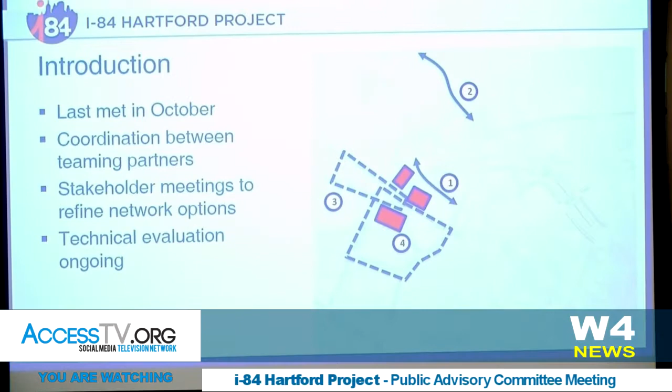where the new ramps are going to touch down to the new boulevard next to Bushnell Park. These are all really interrelated, and to further complicate the issue, depending on which station concept — north or south of Asylum — we go with, that may dictate different road network options. So we're trying to look at all these things together, and as you can imagine it's very complicated, but we're going to walk through a presentation largely involving this area today.

But I want to invite Casey to come up here and start that conversation, and Nick Mandler will be running the 3D model, so if there are any visualizations we need to see that will help us communicate this better, just let us know and we'll go to those areas.

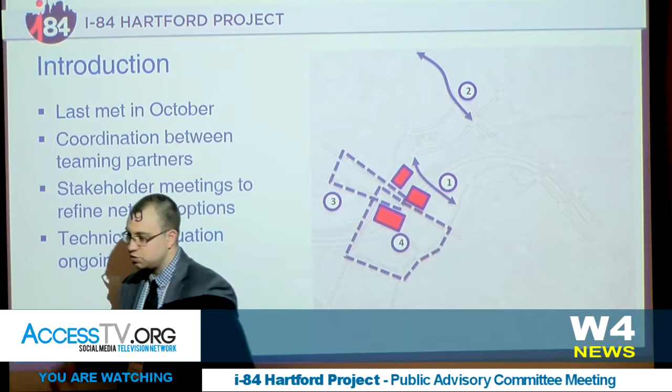Thanks, Mike. Good afternoon, everyone. Hey, Mike. Bear with me, I'm just getting my laser pointer set.

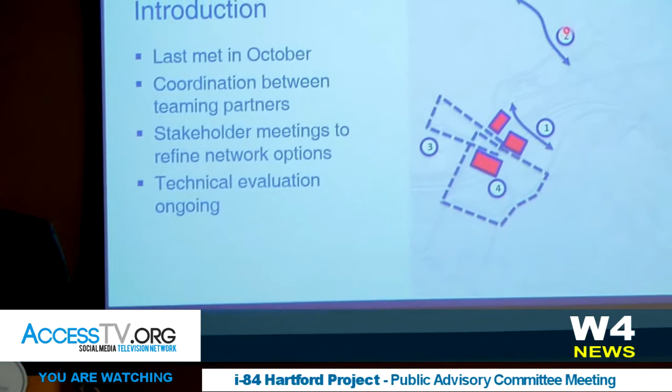Okay, all right, so I'm going to talk about 3 of the areas that Mike introduced on this slide: the Garden Street piece, the association with traffic towards the Asylum Hill neighborhood, Ashley Street, and then the Trident.

And actually later, in the second module, this area here where the eastbound ramps are, near Bushnell Park, that'll be discussed, really intermixed with the multimodal station planning.

So I wanted to start by resetting everyone where we were at in June, the last time we presented to this group with the lowered highway alternative. This is our eastern interchange option 3BE5, looking at the eastern part of our project area. Here's Broad Street, and the map extends to about Trumbull Street.

With the lowered highway, the big first piece is the relocated railroad shown with this red line work, which would go underneath Broad, Farmington and Asylum, rail platforms in this general area, and continue north under Walnut, then Albany and Main. Where does it go today? It comes under I-84, around Bushnell Park, Union Station's right here, under I-84 again, and matches up where our line work is up in the Walnut Street area.

That relocation of the railroad is what allows us to drop the highway down to grade. So this yellow band here, the proposed I-84, would go beneath Broad Street, beneath Asylum, and continue around into that kind of canyon area we have today, under High, Ann Uccello Streets.

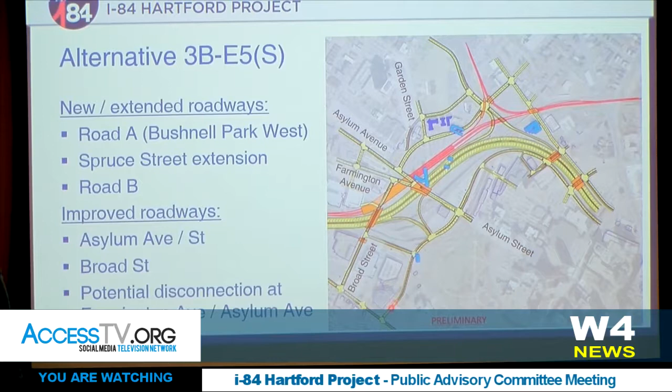In terms of ramping, here in the eastern part of the project area, we propose eastbound off and on ramps to a new road, which would connect Capitol up to Asylum, and westbound off and on ramps at a relocated Cogswell Street. Today, Cogswell Street comes up to intersect with Myrtle and Garden. We're proposing to realign it, ramps to here, and then it matches into Edward Street at the intersection with Walnut.

So this is the version of this alternative we had back in June. We wanted to highlight some of the new connections inherent in that proposal. That new road from Capitol to Asylum, Road A or Bushnell Park West, is a new north-south roadway that's not there today.

We're proposing to extend Spruce Street. Today Spruce Street ends at Church. We're proposing to bring it all the way around into Chapel Street South, creating one long street that would start all the way down at Capitol and extend over to the river. And then we have that new east-west roadway, which would connect Broad and that new Road A, Bushnell Park West.

In addition to those new connections, we see opportunities to really improve the character of Asylum and Broad. Today you have on or off ramps on each of those roadways; under this proposal, you would have none. So there's a real opportunity to strengthen the way those streets serve, not just as ways to move cars around, but for people moving between the neighborhoods and the city.

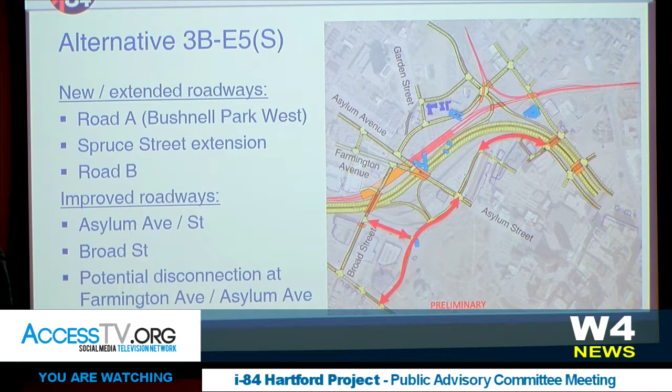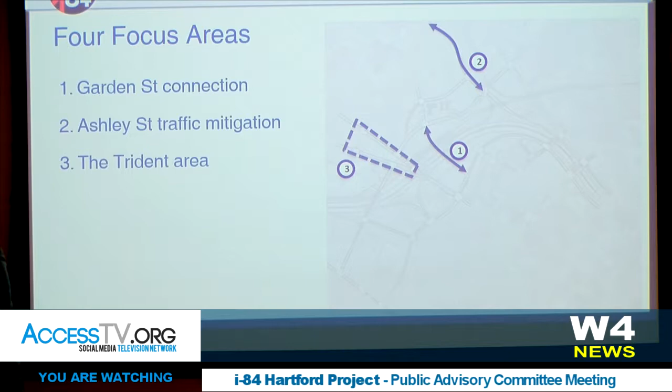Mike touched on these — the four real focus areas of our work over the last several months: looking at that new connection across the highway, which I'll talk about; addressing comments we've received about the perception that the new ramp system might push traffic towards some residential streets in Asylum Hill; and the Trident, where we've heard from every cross-section of our advisory committee, stakeholders, and the public how important it is to find a good solution there.

And then when we talk about the station, this area, which we envision as potentially being capped as part of the lowered highway alternative, maybe Nick can show you. So he's got a piece on this.

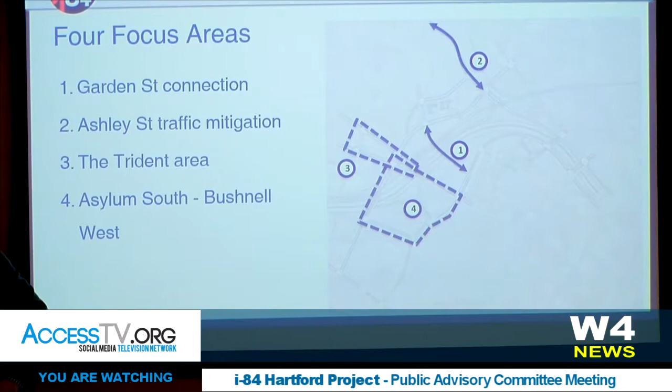So this is the area where we're talking about potentially capping, between Broad Street and Asylum. The things we're looking at there could involve how a local street could be connected there, and what some of the options are.

For that first focus area, we've talked a lot about how we could improve connectivity over the highway. Today, Myrtle Street comes down the hill, goes under the highway, and matches with Church Street. That connection exists today, but with the lowered highway, we can't maintain it in that configuration.

The lowered highway would be at the same grade as that roadway, so with some of our other interchange options, we've come up with different ways to address that.

Is Darth Vader going to come in? Sorry about that.

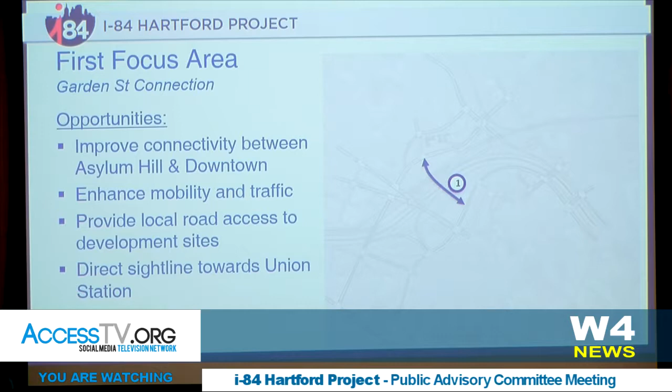One of the detriments of this interchange option had been an inability to connect there, given the location of the ramping system and local streets. We struggled to find a way to connect that. Through collaboration with Tom Jost and Bill, the city's consultant team, we identified a way we weren't looking at before: extending Garden Street. Today Garden Street angles down into where the Asylum ramp comes in. The idea is to extend it over the highway all the way to Spruce Street, adding an east-west connection. We like redundancy in the road network.

Here's a clearer picture of what that could look like. It's this yellow and orange piece, where the orange denotes the bridge over the railroad and the highway. That east-west redundancy is really helpful to us.

Many of you know the struggles we've had with traffic at the Trident, and the struggles we have today under this new lowered highway alternative — there's a lot of traffic trying to make its way through that intersection. Any redundancy we can provide in the roadway network can help draw traffic out and make that operate better.

In addition to being an east-west crossing of the highway, we see an opportunity to facilitate north-south movement as well. You could start from Capitol Avenue, take the new Bushnell Park West or Road A north to Asylum, continue through, take a left and go up Garden Street — another way for people to go from Frog Hollow to Asylum Hill and back.

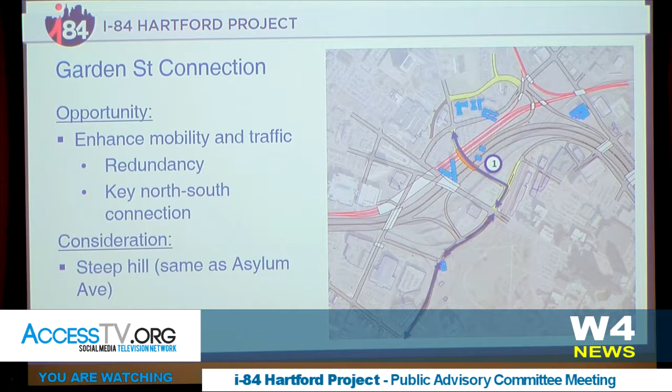We do want to mention the grade. The roadway is going from a higher point on the hill than Asylum goes to, so it would be about the same grade as Asylum. We're looking iteratively at the best way to work with that.

We're looking at Spruce Street towards the bottom of the hill — can we raise that a little bit? As we continue to look at this Garden Street extension, those are details we're working to bring to the public and to you early next year.

Moving on to the second focus area, which we're calling the Ashley Street traffic mitigation. We've heard quite a few comments since we first proposed this ramp system. I've zoomed out here — the western extent of this map is the St. Francis Hospital campus, and here's the ramp system that relocated Cogswell Street and Fraser Place.

Today, the primary east-west traffic route from I-84 to St. Francis is Collins Street. You'd come off I-84 from the east, off Asylum, up Garden, and then you're on Collins right to St. Francis. One question or critique of this alternative had been that the ramping system appeared to point cars toward a more residential area — Ashley Street and the Sargeant Street residential neighborhood of Asylum Hill.

Being engineers, we like to draw roads, so we put pen to paper to find ways to change the road network that might better fit traffic patterns as they are today. First, we had the idea of looping Fraser Place around to Garden Street. That's a bit more roundabout, and it would impact property owned by the Hartford that they use for parking. So that was one thing we looked at.

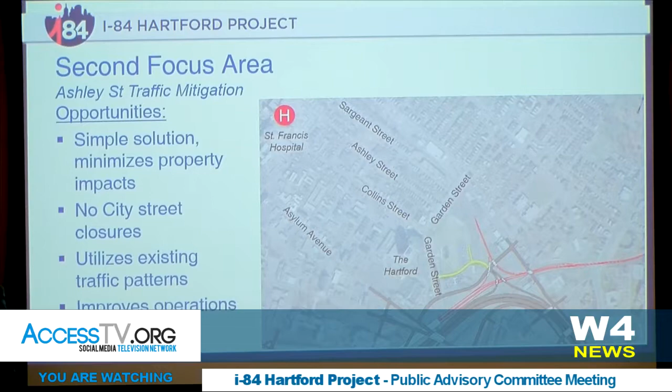So what you're changing is the Asylum Street exit ramp, right? Yeah, as part of this lowered highway interchange option, the Asylum off-ramp, which comes here today to Asylum, is pushed back and goes up to that relocated Cogswell Street / Edward Street. Okay, so the ramp isn't really moving, it's the feed into the public streets that's changing. That's right. Okay, right, I got it.

What are the two options? I think he's talking about these two. You mentioned two options. No, the Garden Street crossover, the new connection that would replace Myrtle, and the one he's talking about there is for the realignment. Okay, and the second one is the one you just wrote? No, these both would happen together. Oh, they would both? Yeah, so let me advance because the next slide kind of deals with that.

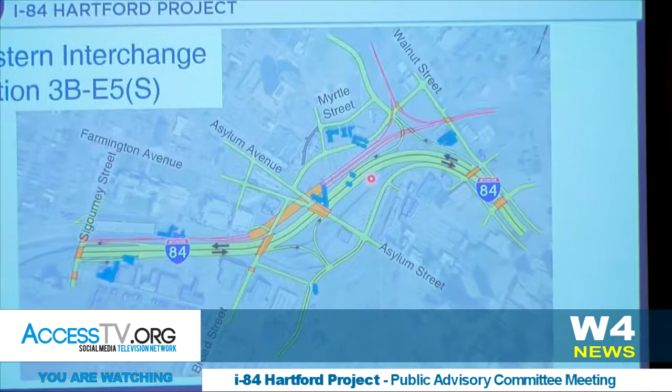So basically what we're saying is this is how the interchange option looked before, where Fraser Place went all the way up, lined up with Ashley, no Garden Street. So we're looking at adding that Garden Street, making that change near Myrtle Street, and ultimately that's what the current version of the alternative could look like now. So the westbound off-ramp would lead directly into Myrtle Street? That's correct. And in addition, you would do the S-shaped curve into Collins? No, this street just lines up to right where Fraser Place is today. So Fraser Place continues up to where it does today, and it just kind of tees into this as a side road.

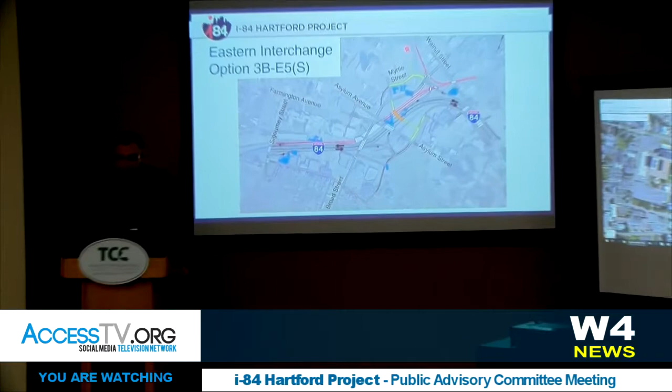So this is Myrtle, and that's Fraser. Still look like you're not clear on it. Because we're going to talk about the Trident next, so it doesn't get any easier. I want to just make sure we're good on this.

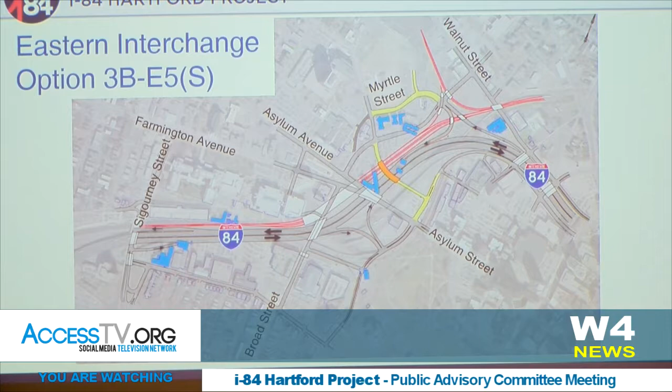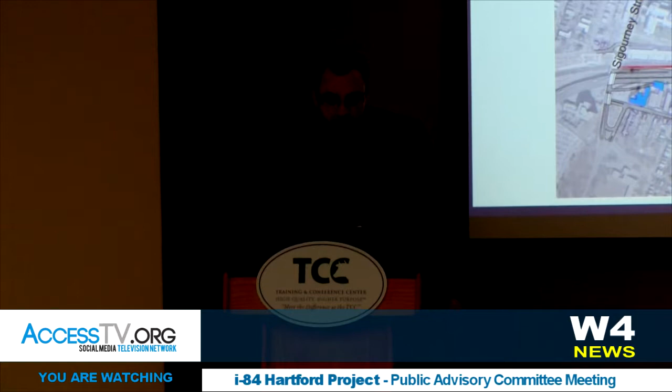Okay, well I have another question then. What impact does that have on traffic that's going to the Aetna and the Hartford? It looks like it favors the Hartford, but it sort of gums up the Aetna. Is that... So I think the two changes that I talked about wouldn't really affect how traffic goes to Aetna. They would probably either be taking this direct left off the ramp, or they would be just going all the way to Sigourney Street. So under any revision to this street network, I don't think that really affects how people get to Aetna. And ultimately, I think it still really does feed into the Hartford's parking areas in a similar manner. We'll certainly look at how those various turning movements work just to make sure they're okay.

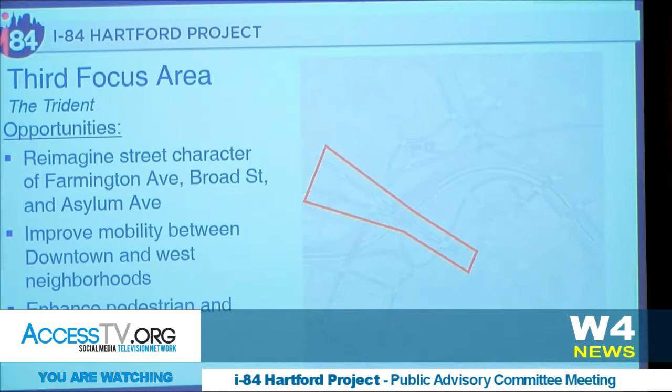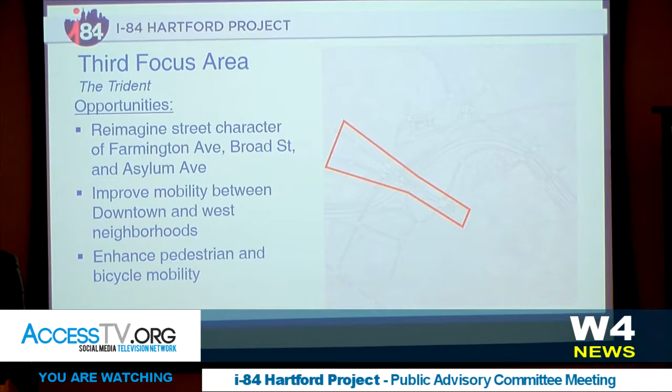You're welcome. So as Mike kind of teased for me, the next part here is focusing on that Trident area. And as many of you experience on a daily basis, the existing operations are poor, particularly in the afternoons. One of the first things I want to start with is just to reinforce this change in the I-84 ramp system, which has a change in how vehicular traffic certainly would use the Trident. And that's it today, this is Broad Street. I know it's a little hard to see in the grayed out map, but today there's that eastbound on-ramp from Broad Street, and that carries a significant volume of traffic, particularly during the afternoon, where people are getting on the highway to go east or to go to 91 north or south.

So under the proposed lower highway, that eastbound ramp then is moved, right? It's moved to this new Bushnell Park West. Ooh.

And the eastbound on-ramp would be here. So that's a change in traffic patterns and even how a significant portion of traffic moves through the Trident series of intersections. People coming from, say, West Hartford, rather than coming straight down and onto Broad, would now come down the hill and wrap around onto the ramp. I just want to lay that out there so people have that in mind as we go through some different scenarios for how those local roads could be configured.

And generally speaking, we understand that it's not just a vehicular issue. Those intersections are rather inhospitable for bicyclists and pedestrians and even transit users. It's really tough to move through there.

We've heard a lot—I mentioned before that one of our options does discontinue Broad Street at these intersections. We've heard a lot about the importance of that north-south connectivity, and we understand the sensitivity there. As we look at these various options we've developed, we're using some of the traffic fatal flaws we've used on the various interchange options during our screening process to kind of be that first level test.

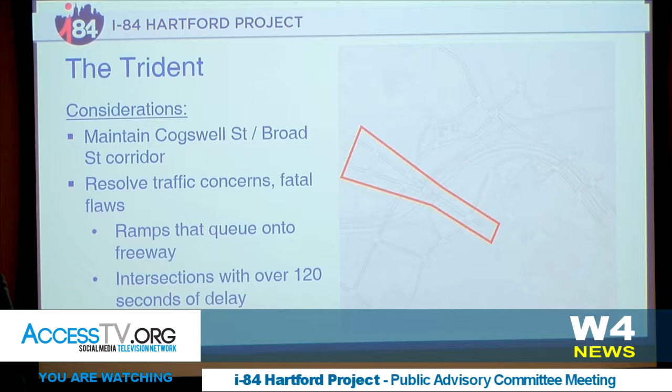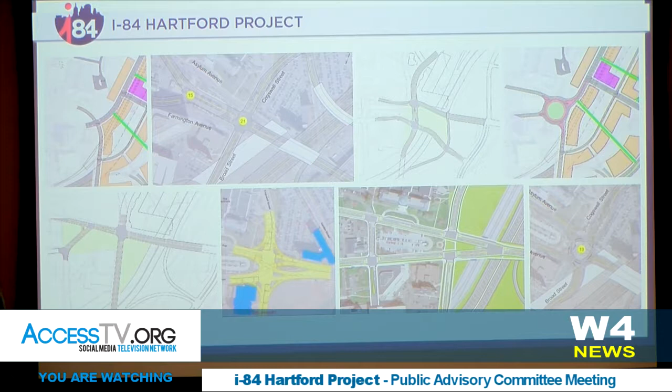So like I said on the other stuff, we like to draw. We've tried a whole bunch of different options, and I'm going to end up going through about 4. We applied those critical criteria and sort of a gut check, and many of them were taken off the table at that point. But some good ideas have certainly come of that, and some great ideas have come through our working sessions and our involvement with the public.

So I just want you to think as we go through the 4 options on the table about how we might measure them, because that's going to be the next step for us. We're going to take the feedback we get from you, and work over the winter to come toward some resolution on which of these concepts for the Trident we'll move forward with.

So obviously we want to improve traffic operations and safety, mobility for all users. That's enshrined right there in our purpose and need. We also think the footprint of the intersection is important—it plays a little bit into bicyclist and pedestrian mobility as well.

Which intersection—this is for the Trident area, so which intersection specifically does that refer to? It's Farmington and Broad, Asylum and Cogswell, and then kind of the whole area.

We're going to minimize property impacts—that's important for any public project. And then, right there in our goals and objectives for the purpose and needs statement, we're looking to potentially look at opportunities for development.

So there are 4 general options I'm going to go through here, and I'm going to blow up each of them one by one. We've organized them generally from least challenging to most challenging, and I'll point out some of those pros and cons as we go through.

So this first one we call discontinuous Broad Street—we really need to come up with some slicker names. The idea here is, because of what I explained earlier about the shifting of the ramps, with the eastbound on-ramp located here, a big demand to cross this intersection north to south is gone. Not all demand is gone, we understand that, but a big amount of it is. So we tested it—when we first looked at it, we weren't really sure how it would work, and ultimately the traffic operations perform very well.

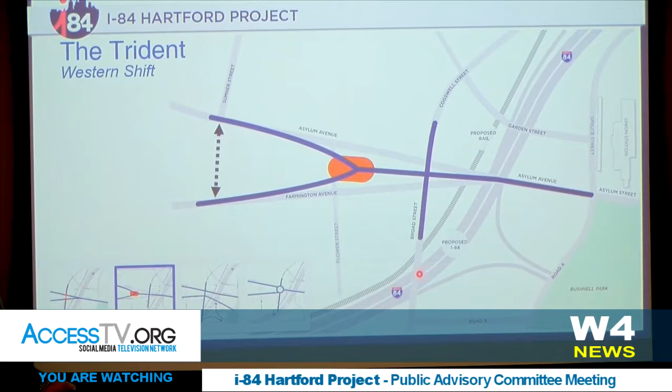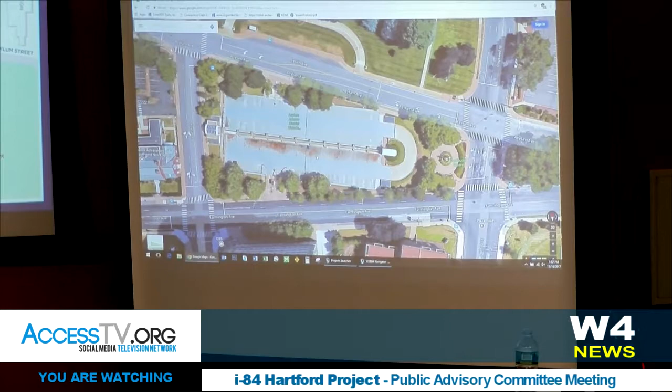Another final impact to point out is that, in plan view—when we look top down—Nick, can you highlight that? This is the DAS garage. It's actually subterranean—you're looking at the top level. It goes around and down into a ramp right there, with about 530 parking spaces, many below grade. So we have our structural engineers looking to see whether those subterranean spaces could be maintained. The roadway would be constructed on top of the garage. If we can provide access down below, could we retain some of those parking spaces? That's something we've just started to look at and will be working through in the next several weeks. Is there anything on the Western Shift?

Just curious about the intersection—it feels like you're just moving the same problem further to the west, only now dealing with acute angles of merging traffic. So that would be a signalized intersection, controlled by a traffic signal.

And actually, I think, Nick, correct me if I'm wrong, that would actually operate better from a delay perspective than this intersection? Yeah, the trick is, right now you have a very, very short storage length between Asylum and Farmington on Broad Street. That's really the crux of the problem.

So it doesn't solve all the problems. It does move that heavy traffic movement to the west, but it also helps get rid of that really short storage space.

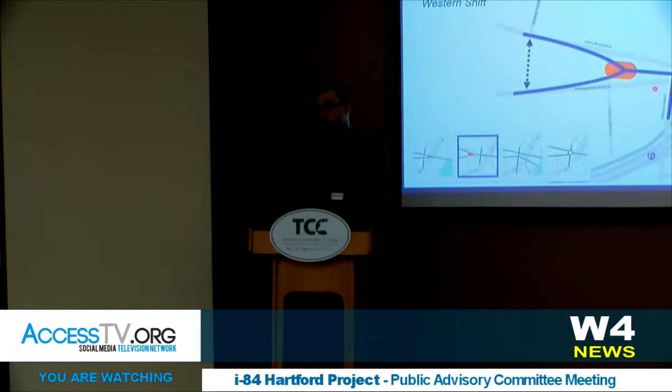So there could potentially be some traffic queuing along this segment here. It's nothing we've identified as a fatal flaw, but it's certainly something we point out, particularly during those peak periods. Other questions?

So through our coordination with the city and some of the other stakeholders, we've identified an opportunity to potentially extend Farmington Avenue. That would take Farmington Avenue, and rather than have it merge in with Asylum, bring it all the way down the hill and have it dead end right at that Bushnell Park West, Road A. So this came up as an idea to improve east-west connectivity. It would add a second east-west road across I-84.

However, when we started to look at it, we did note that it would require us to shift the on and off ramps to the south to make room for this extra intersection. And when we do that, it actually makes this off ramp shorter. And that became a potential problem when we talk about those fatal flaws associated with ramp queuing.

And we're actually in the process of working with the city's consultant team to do a third-party review of the traffic model, just to make sure we understand those traffic volumes coming off that ramp. And we're going to be continuing to work to confirm that over the next several weeks and months.

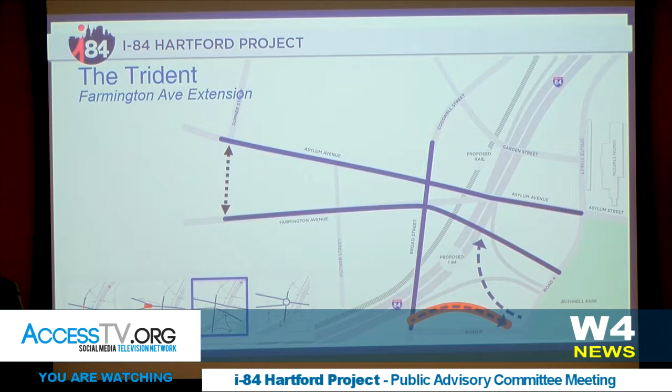And I don't know, Tom, is there anything you wanted to add on that particular option? Just that, you know, the goal with Farmington Avenue is an important one to think about, which is that what you're really trying to do is enhance connectivity in that south quadrant. And Farmington Avenue Extension is one way to think about that.

And I think that as we look at what to do in that area, our overarching desire there is to create connectivity and to be able to activate the spaces, whether it's open space or development or some combination of those. And that was the genesis of the Farmington Avenue extension.

And so obviously the ramping system is very, very constrained in that area. And so I think we have a lot of ways in which to work around that as we look at the model and see what it is that we can do in terms of exactly where to locate the ramps, or slightly move the ramps and whether or not this can fit. And I think you're going to talk to some of that in the next module of the presentation.

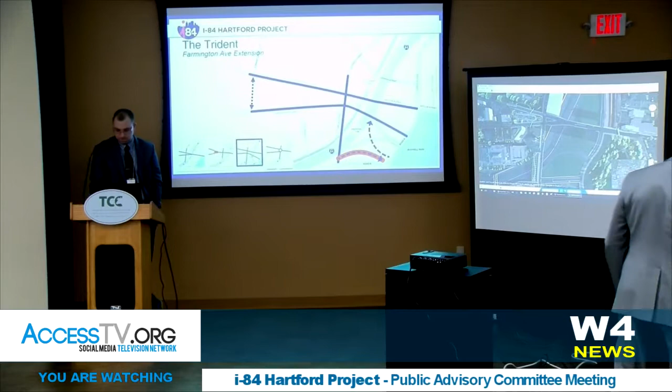What does that do to the capping in that area, if Farmington's going right through the middle of it? It's a good question. So, just to repeat the question, the question was what does that do to the capping? And I think it wouldn't change much.

Structurally, there'd be a change. There'd be the structure to carry the roadway would be a little different than to carry open space. But I think the feasibility of capping between Broad and that Farmington extension, and that Farmington extension and Asylum, would still be there.

It would go right over the road? It would be like the sidewalk of the road extended. Nick, can you pull that up? Yeah, it would be sort of like how Broad is connected to Asylum in that proposed cap. There'd just be a road through the middle of it. So Farmington would be at the same grade as the cap.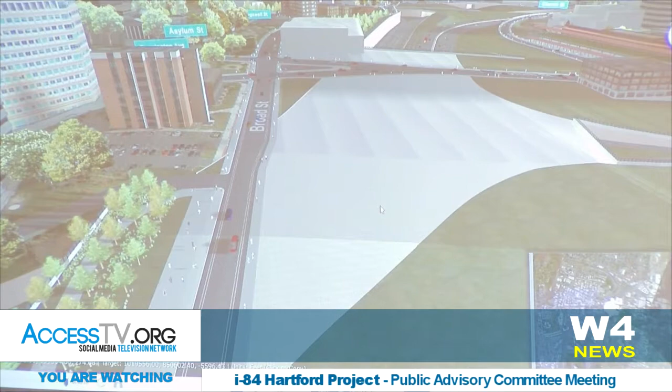What would happen if instead of having to move the ramp so you could get the Farmington extension in there, what if you left them where they are and had the Farmington extension take a sharper turn south and have it end up closer to Road B? What would that do?

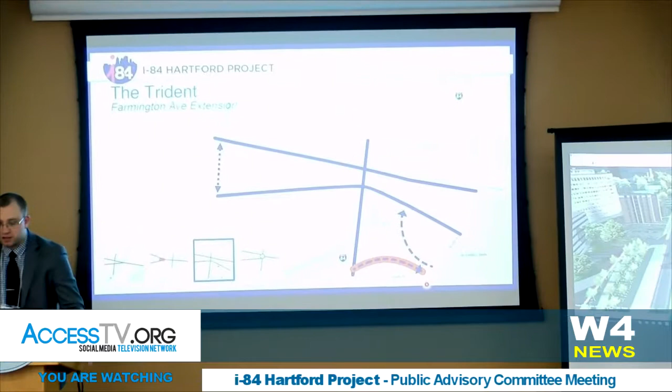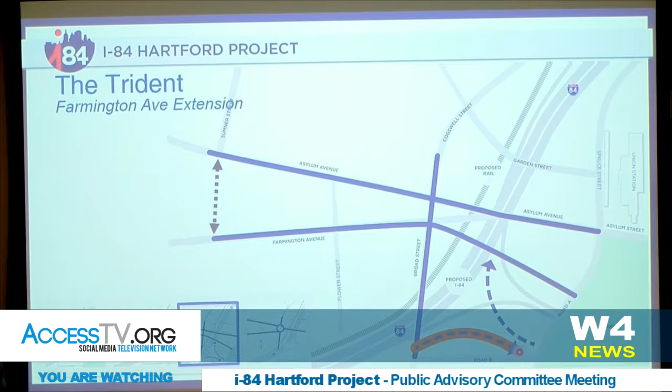You know, we did look at that, and the one thing we noticed with that is it meant that a lot of that traffic that takes Farmington and is destined for the CBD was then routing through Asylum Place. They were coming in and up at Asylum Place and down Asylum because that Farmington extension was now so far to the south. And we were finding a kind of fatal flaw with that at the Asylum Place intersection, it was really just pushing too much traffic through there. But as we continue to review the traffic models, we'll make sure those conclusions are still consistent.

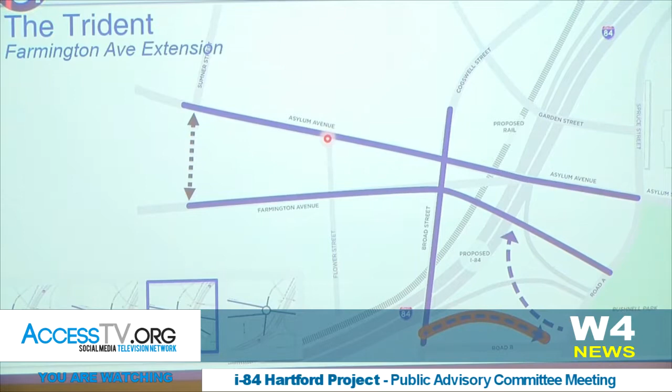There's some sort of one-way operation now on Asylum Street around the hospital. Does that continue to be a one-way and then shift in the morning and afternoon?

I don't think that's in place anymore. I don't even know, that's a good question. No, there definitely used to be a peak period reversal where at certain times of day it was one-way in certain directions. I think that's been removed, and it's now two-way all the time.

The other question is about 53-foot trailers and full sleeper cab trucks trying to make some of these tortuous turns around this reconfigured highway. Have you contemplated the difficulties presented? Absolutely, and you're probably thinking of that option I showed earlier with an S-curve. That's one reason we don't view it favorably, because of the horizontal geometry, which could be a tracking issue. We're definitely mindful of our horizontal curvature and how large vehicles would interact, especially on these multi-lane roadways where tracking for large vehicles would be an issue. So yes, we are keeping that in mind.

Last one, the fun one - oh, roundabout. We've heard a lot of questions over the last several months and years about putting a roundabout at the Trident, and I think it's been studied by several.

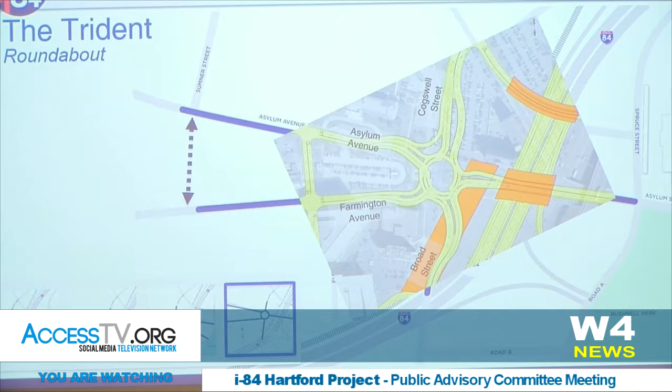So our recommendation at this point is that we move forward without the roundabout, but that we continue to look at roundabouts at intersections in the project area where they're appropriate - where they serve less traffic and could be good gateways into neighborhoods adjacent to the highway and major arterials.

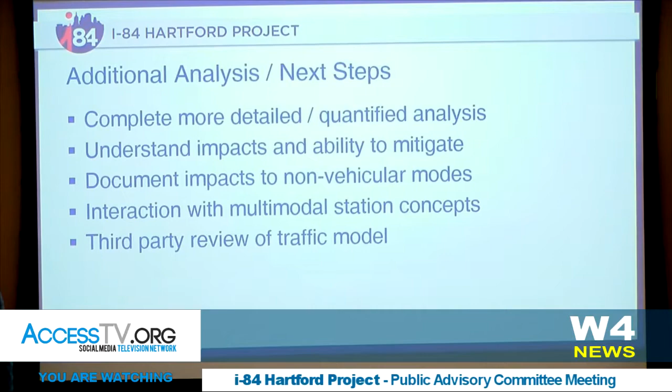So what are we doing now? We're going to take the slide from before where we talked about our goals and objectives, look at those, and really quantify how each of these options on the table ranks. We expect to take the feedback from the late October working session and from you today, build that into our assessments, and come back to you and the public early next year with recommendations about where we think we're going to head with these roadway network options in this area.

That obviously means quantifying traffic impacts, looking in more detail at how bicyclists and pedestrians would interact at these intersections, and how they work with the station planning concepts that Gina and Tom are going to get into very shortly. I also mentioned the third-party review of the traffic demand model, just to make sure we're all on the same page with that.

I think there's some discussion, Mike. I don't know if you want to moderate.

I just wanted to say, I think what you can see from this presentation, which was really nicely done, is that this is all about trade-offs. It's really hard to solve every problem that the Trident represents. So what we're trying to do is find a balance.

What's the solution? We don't want it to be a total traffic solution. It's got to fit within the context of the neighborhood. It's got to be able to accommodate all users equally well and all of that. So I think the ideas laid out here might not be the panacea we all hope for, but some of these do a lot of those things fairly well. None of them do them perfectly.

And I think we have to really decide which direction we want to go. Do we want to tolerate a little bit of congestion so that we can have better, safer streets? Do we want this thing just to move a lot of traffic? I don't think that's what the city has in mind, but we also want to make sure we don't impact the highway ramp configurations that have already been worked out. So like that initial graphic said, some have the least amount of challenges, some have a very high amount of challenges, like the roundabout.

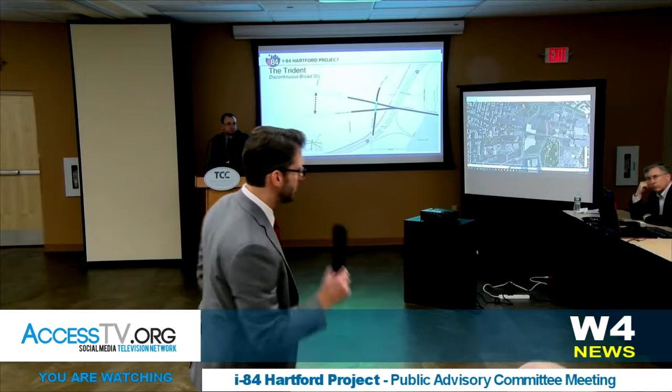Just a question, Casey - could that bike-ped connection have removable bollards that emergency vehicles could get through if need be? We're talking about needing it now - not getting out of the car, pulling the bollards out, and then going. It's got to be just a standard roadway to get through. I'm not familiar with how high-tech that technology is. It's not, it's not, it's not.

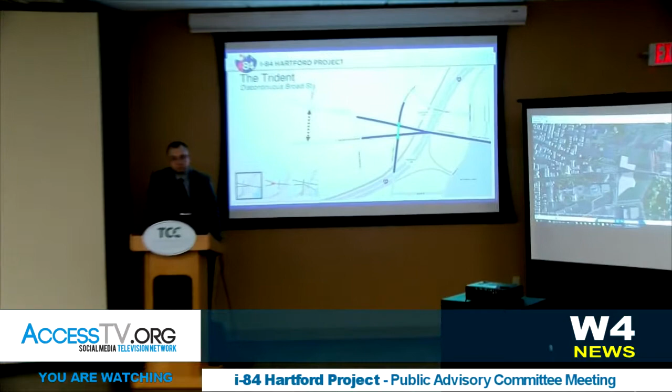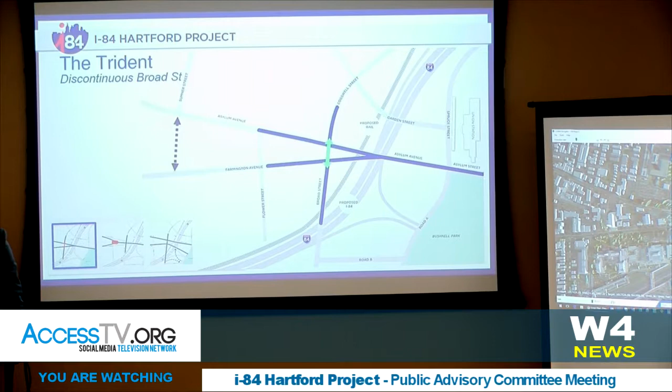Any other thoughts? I'll go to Jackie then. Well, I have a couple of thoughts. It seems like extending Farmington Avenue has some attraction. Number one, in the winter, you're not dealing with that steep grade going up Asylum Street. And just for 44 apartments and the art space, we might be able to exit on Farmington Avenue versus Asylum, which is death-defying some days trying to take a left turn out of there. Believe it or not, it's easier to go around the park than to take a left-hand turn. So those are my two thoughts on that.

I just want to throw out there, and I didn't mention it when we talked about it, but the Farmington extension would not be flat. It has to go down the same hill that all the other roads go down, so it'd be a little flatter, probably in the 5% range, whereas Asylum's 7%. So a little flatter, but it would still be a relatively significant grade - kind of right at the high end of pedestrian mobility.

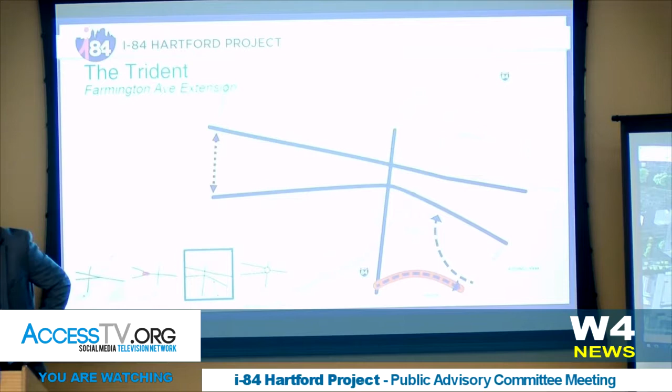So my question was about the extension as well. From my perspective, of the choices presented, it seems like a great idea in terms of alleviating traffic flow and regularizing intersections, which seems a lot safer and handier from a pedestrian perspective as well as a vehicular flow traffic perspective. I was curious about the comment on the ramp being a little too short, and it brought up the question of the hierarchy of needs - is it really about over-accommodating the interstate as opposed to the local roads? And two, now that you have more regularized roads as well as parcels, does that mean there's more opportunity for development? I'm not quite sure what's happening between Asylum and Farmington to the east, or between the interstate and Broad Street as well - just that whole new level of space.

So about the ramp, the concern we're looking at is that the ramp, particularly during the morning peak hour when a lot of people are coming off the highway, would back up onto the freeway. That is what we feel would be a fatal flaw.

I hear your question about the hierarchy, and it would be dishonest to say there's not some hierarchy. We're trying to make sure we're cognizant of all the different modes and roadway systems. But because you mentioned the attractiveness of this concept from a bike-ped standpoint, since we're keeping this section all open and connected, those roadways will need to be pretty wide to let traffic go through and queue between these two intersections. So you're looking at a segment of Broad Street here that might be 8 lanes wide.

So maybe that's a little misleading with all the options, that there isn't a true sense of traffic rates. Yeah, that's our constant struggle, how much detail to throw at you guys. We do have some maps we could show you, and I think we envision another standalone public working session that would present a lot more detail. It's tough to tell with the thin blue line.

Last June when we all met, we started to focus on this for the first time. Again, Trans Systems, Gina, Jim and their group are working on the programmatic needs of all these stations, and where that'll best fit. We're working a lot now on the whole integration with the urban design, and that's what the city's consultant has been brought on to help do. So it's been a lot of back and forth understanding how the bus bays work in concert with the station and where the rail passengers go. And then what happens with the development around the station, getting to your question. It's really important. And then ultimately, how do the roads work to serve all that? So it's really trying to look at all these things in concert.

We also need to understand that we're thinking very carefully about how to phase this. Gina will talk a little more about that in her slides, but we have to think about the construction, moving the railroad so it remains working while the highway is being reconstructed, and then building the station, trying to avoid as much temporary work as possible so we don't have to replace things down the road.

So Gina's going to walk you through about 5 concepts that really focus on whether that station's north or south of Asylum, and what that means for the integration of bus and rail and other modes. And then we'll have Tom and Bill come up to talk a little more about the design and development opportunities around those stations.

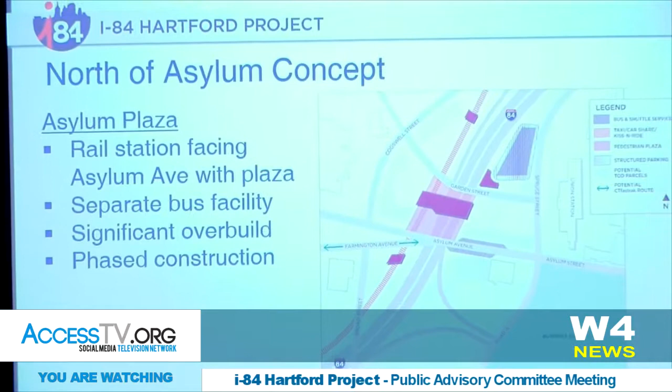For those of you who were at the October work group meeting, these are repeat slides. For those at the June PAC meeting, we've simplified the slides and reduced a few of them to simplify different options within the same concept. So what I'm going to present today are 3 options for the north side of Asylum and 2 on the south. What we're trying to focus on here is, as Mike said, where should the station really be located - on the north side or the south side? And as part of that decision, how should the bus facilities and the rail station be laid out together?

For those who are new to the project, or for those who need to be reminded, the tracks are going to be moved about 1,000 feet west of where they currently serve Union Station, causing the need for a new rail station. Hand in hand with that rail station, we're considering where the bus facilities should go.

This would be the Intercity Bus, Peter Pan, and Greyhound, as well as CT Transit, the local buses. We've heard through the public as well as through different workshops with the Transit Technical Committee and the PAC that a multimodal facility seems to be the way to go. So integrating both the bus and rail facilities together so that passengers on both modes are meeting in the same station facility, or at least proximate, so they can transfer between the different modes succinctly and conveniently.

The first station concept, on the north side of Asylum, we're calling Asylum Plaza. This would be a station facility at the pink area. This is a bird's eye view, and this is at the street level. The station itself would have different levels, because once the highway is lowered and the tracks are lowered, that would be below street grade.

You would enter the station facility at the street off of Asylum in some areas, and then go down to the track level and platform level below. Picture this as a bird's eye view at the street level. The purple box represents the rail station, and the tracks are at this location. To orient you, this is Cogswell, this is Asylum, this is Spruce, the current Union Station, and this is the new Garden Street extension.

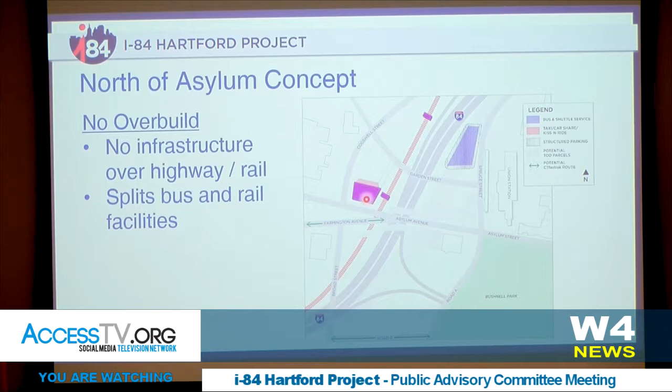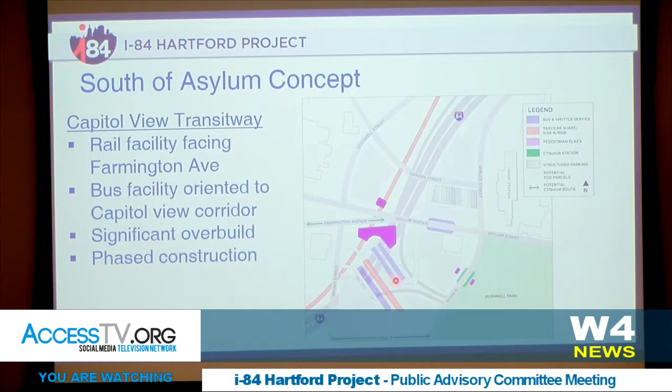Another option on the south, we're calling the Capitol View Transitway. The rail facility would be really off of Farmington Avenue if this Farmington Avenue layout remains. The bus facility is over the highway, but in a north-south longitudinal manner. You would have access on and off of Broad Street. And this, again, would be your rail station, which could be constructed as soon as the tracks are in place. So that could be built as part of phase one.

Now, I really would like to call the city consultants up, because what they're going to do now is they've refined the concepts to integrate them with potential economic development, TOD development, as well as local street networks, so that you can see what it could be envisioned in the future.

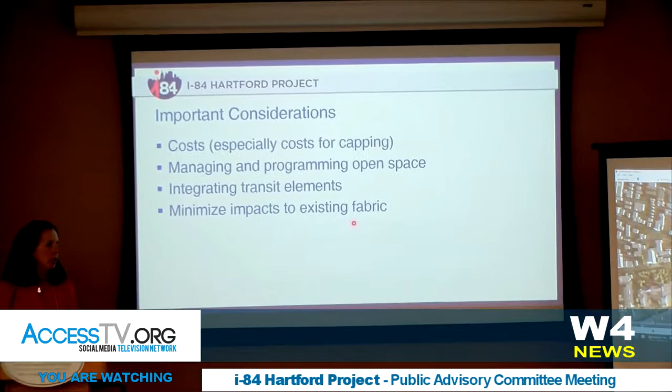So just to recap, Gina just showed you 5 options, 3 to the north, 2 to the south. Again, just like the Trident, it's all about trade-offs, and I think this is where the city's consultants have given a lot of thought to which one of these maximizes the city benefit. So, Tom, you're going to start off.

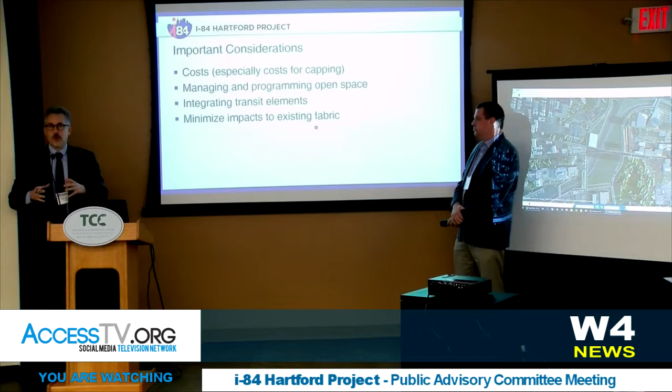Great, thanks. Again, we're trying to build off of these station siting strategies and think about how they fit into the larger context of the neighborhood. Some of the important goals are enhancing and improving connectivity, really trying to create a strong sense of place.

It's a large area that with potentially a lot of vacant space or open space. We want to build it out. We want the Asylum Hill neighborhood and the downtown to feel as one big connected zone. And so we want to make sure that we create that strong sense of place. And as part of that, really understand economic development potential and make sure that we're doing things that can enhance and create that development potential in the places where it really makes sense to happen.

But we have to think about how to do that in the context of the cost of this project, and obviously we have to be cognizant of trying to make this a feasible project. We want it built. And the costs of capping are very expensive, so you have to think about what's the best way to do that and try to minimize capping at the same time.

We potentially have a lot of open space that will be created, especially in the areas where we're capping. And it's great to have open space, but you have to think about who manages it and how it gets managed and how it really gets integrated and is used and becomes part of the community, becomes part of the city, and really becomes an opportunity for creating development and creating great quality of space. So we have to think about how that open space really works in concert with the transit facilities and development.

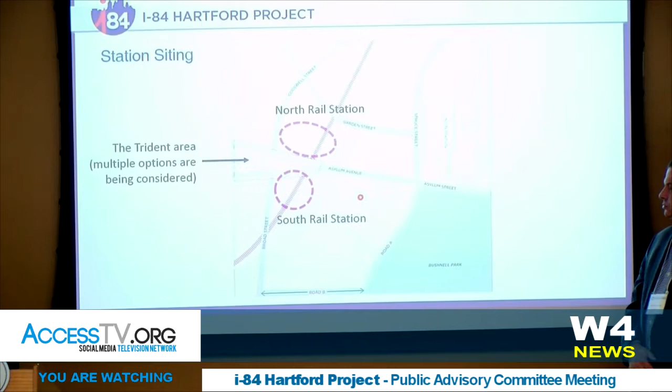What we did was, and Tony actually said, well, let's think about the station and where it goes, and then how this network can possibly work with that, both open space and streets and all. So we took the north station designs and the south station designs and began to think about them with some of the caveats we talked about, keeping the train facility off the highway, but placing it in either of these two locations, north and south, given the network we have, and what we can achieve in terms of all those goals we set.

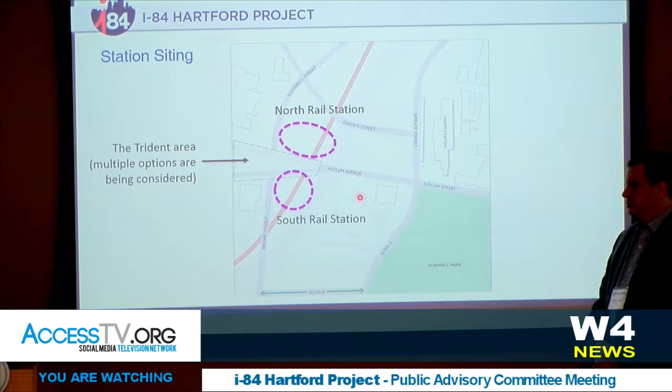So here are some of the exercises that we created. I think the important thing, I'll turn it over to Bill to talk through these, but the idea here is to find that right mix of conditions that create great quality space, create open space, but also our projects and ways to develop this that we think can be really feasible. So Bill, do you want to walk through the first couple?

Excuse me one second. Would it be easier if Bill pointed to this? Most of the group is on this side of the room. Would that be a better screen to look at? You can use the pointer that's on the... I'll be your pointer. Okay. Yeah, I can do it.

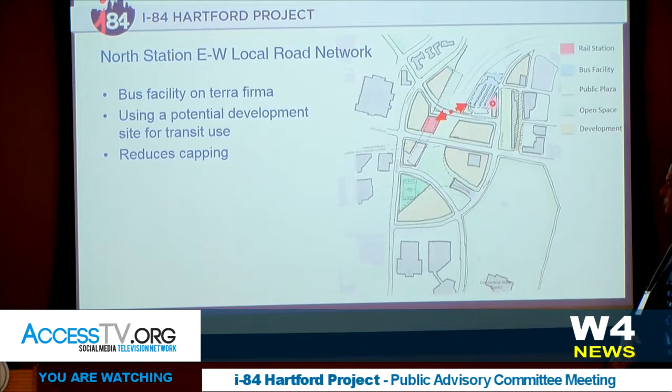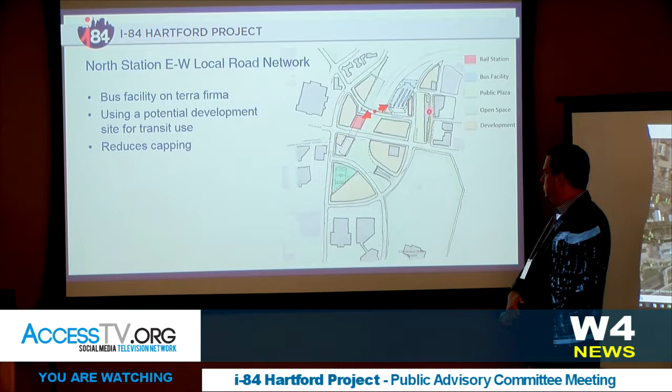So if we are looking at an off-cap strategy along Garden, I think Garden becomes a very important street for people to be able to utilize and feel that they can move easily between the different facilities, the existing Union Station, the bus, the parking, and the rail and the open space in there. That's going to be a very important consideration if this turns out to be one that people feel strongly is really the direction we want to go.

Is there data that you're using supporting the importance of having a bus station very near a train station, as far as having them connected?

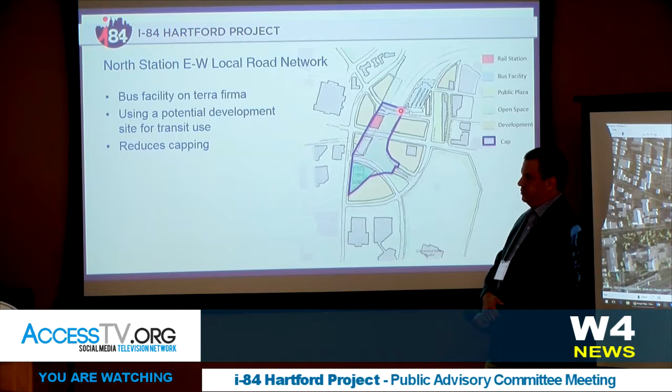I think we recognize the importance of, in general, the downtown area being a very well serviced place by multiple modes of transit. I think what you're asking is, do we understand how many people are coming in on bus and switching to the rail? I don't think we have that data. It's both over-the-road long haul buses and local transit buses, and the transfer between those two different types of services is different as well.

I think we feel strongly that connecting the local bus and rail is going to be a very important element to creating the type of behavior so that people feel that if they don't have a car and they need to get to the train, that's a connection we want to make sure is strong, even if currently there isn't a lot of transfers. And there won't be a lot of transfers today because there's infrequent train service. But when we shift from 4 a day to 17 a day, we do feel the train is going to become a much more popular use, and that connection, I think, is a strong one and an important one.

I think what we need to be thinking about is the size and scale of that bus facility. How large of an element is it? How do you look at the different types of buses that are using it and whether they should be together and how they kind of are situated? At the moment, we're kind of showing these as big blocks, and I think when you get down to the scale we want to get to in the next phase, that's not going to look quite as imposing as it does now. But you bring up a good point.

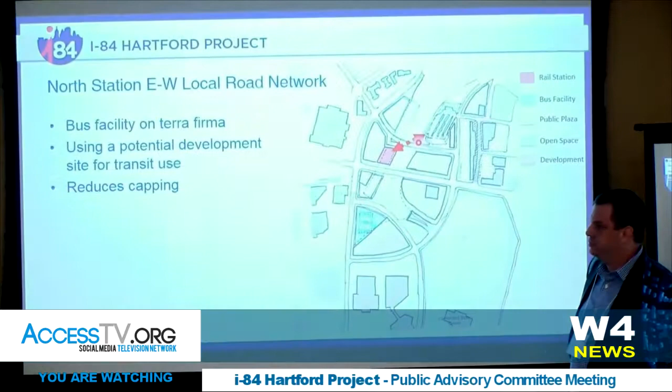The walk in 2 dimensions that we showed on this last slide is actually a 3-dimensional walk. You're coming from a lower point to a higher point. So we have to think about that seasonally, from the perspective of users. Tony, your point is more about where's the best place to place the transit center, but there's also the connectivity piece, so we have to consistently talk about the fact that it's in 3 dimensions.

We've cut a lot of sections, but people don't read sections very well often. So I think we'll have to do the best job we can to really illustrate these points of connection as we get down into that next scale.

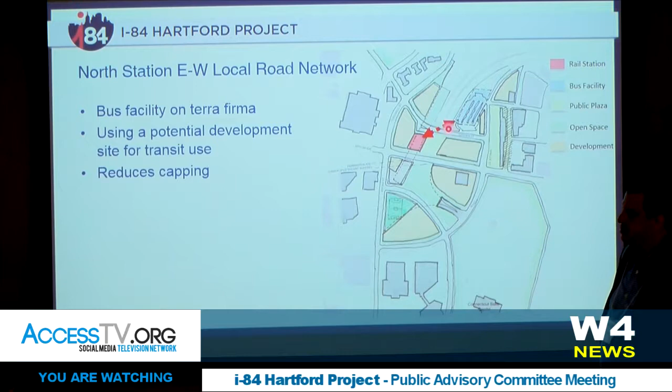Again, if you go back to this drawing, our goal is to set that station at the top of the hill, at that point of highest topography, where you can access the station directly. There are always factors and elements, but there are certain things that really are overarching, and that station should sit in the right place.

We feel strongly there's a strong connection to Asylum, and that it should be set on the tracks. The north is obviously more centered on the tracks, but north and south both are over the track, and that's where you can pivot other strategies off the idea that the central station is either just north or south of Asylum, right where the tracks are. That's what this exercise was all about, trying to figure out how you can fit those pieces together.

On the south side, like the north side, there are some opportunities. So why don't we walk through some of our thoughts on the south side.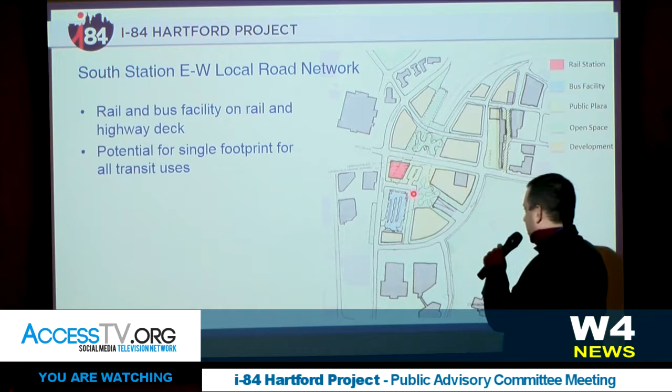Other aspects of this: obviously trying to move the bus station to be proximate to the train station. In this case, bringing in a street that would connect both to the train station as well as to the development on the southern side, allowing access into some of the deeper blocks we're creating, fronting towards the southern part of the block.

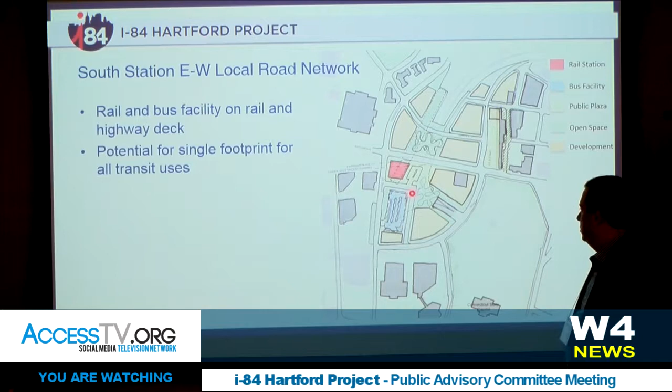And I think one thing we recognize is that it'll be very challenging. We want to obviously encourage development in this area. There is going to be open space, especially open space on terra firma, that can be well positioned for development.

But the economics of building development on a cap are pretty challenging, so if we are capping, we're likely capping as open space or transit use in a lot of regards. One thing we have to think about is, if we have this space and we want to minimize the cap, how do you balance those different elements? We're a little concerned in this alignment about whether we're activating this development space and how this works. So we've continued to try to come up with strategies for integrating a road into that area.

I just want to flip ahead to our second scheme. Well, let me actually, Bill, maybe we'll stay the course. Why don't you talk through the open space ideas?

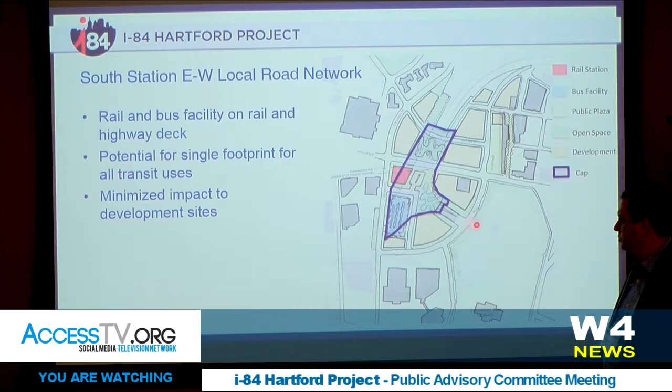Again, you've seen how the cap is extended here. That in some respects breaks the open space and creates a separation. So one of the things we've been thinking about is how we might be able to still extend the green space so there's a feeling of connection between Bushnell Park and the developments and the space on the other side.

One thing we've constantly been thinking about: if the ramps have to end up in the southern block, wherever they land, this is the configuration we're talking about now, how do we begin to mitigate that impact on the interior of the court, the connection to the park, because this diagonal movement we've been talking about for a couple months now, we think is an important thing to maintain in the project from Asylum Hill down into the park.

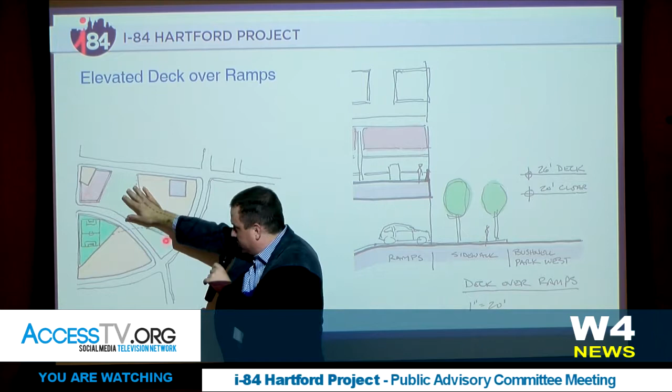How can we mitigate how that tunnel entrance down through the cap gets dealt with? In this case, because the site is higher this way and the roads drop down, maybe there's a way to bend the open space so we can sit a deck on top of that ramp. Facing on Bushnell Park West, you would have this upper level open space that would transition down into the open space we're creating within the development, mitigating that tunnel experience and slice into the cap.

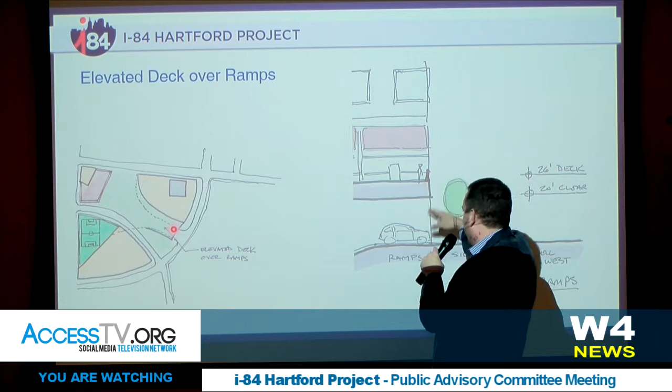So it's a way of trying to deal with the conditions so that you'd have more of a traditional tunnel mouth at the street, but the open space would try to mitigate the experience from inside the court. Is that clear to everybody?

Sort of. I know it's very difficult to go from plan view to these cut sections.

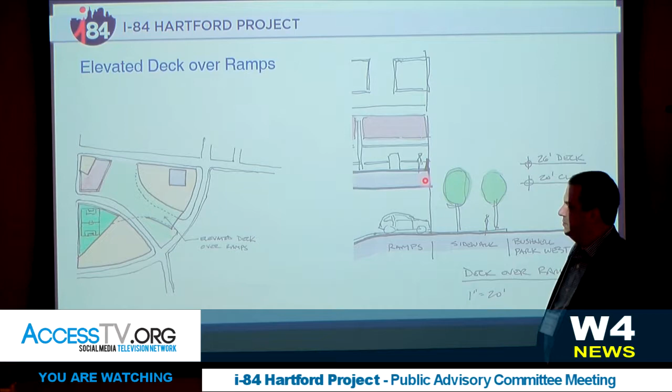Well, the gist of it is that the goal here is to extend an open space connection from Bushnell Park through this zone, whether it's just visual with maybe some crosswalks and whatnot, or whether it's really a direct connection. We're beginning to try to understand, both vertically and horizontally, how we can make a strong connection to Bushnell Park itself, and that's going to set up both development opportunity and the quality of this space.

Because we've obviously gone over our time, I'll switch to the second idea. As opposed to getting a road through this area, Farmington Avenue extended, maybe what we really need is a road through the area, but maybe we can do it in a slightly different way. We need access.

Could we do a radial road design where we create a development zone between Road A and this second road? The second road would sit a little higher vertically from Road A, but you'd create this kind of development zone in here, and that leaves you with the cap space as one big site.

Sorry, I'm talking in and out of the microphone. What's interesting about that is it could afford us an opportunity to have an integrated development at this site, a joint development where you could have private development integrated with transit, bus, and parking, really creating one of those signature downtown hubs. This site, at about 4.5 acres, begins to lend itself to that type of opportunity.

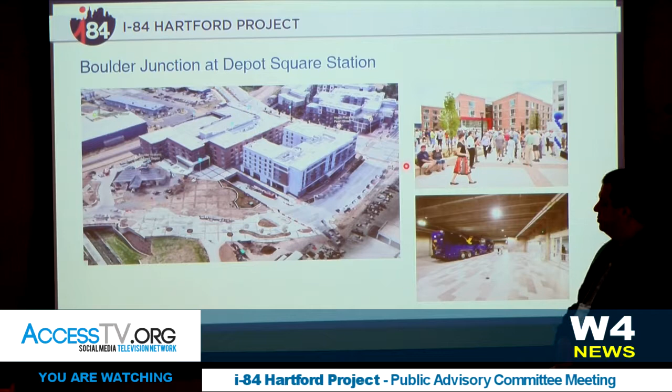Here's an example: Boulder Junction, which was just built, has bus and rail connections. There's about 350 parking spaces, a hotel, residential apartments, and some retail, with a footprint pretty similar in size to the one we just showed you. This gives us some thoughts about how this can be a great signature space, but maybe also one that can integrate development in this same area. If you have development at that pinnacle point, that can set up the opportunity for creating extended open space and development to the south.

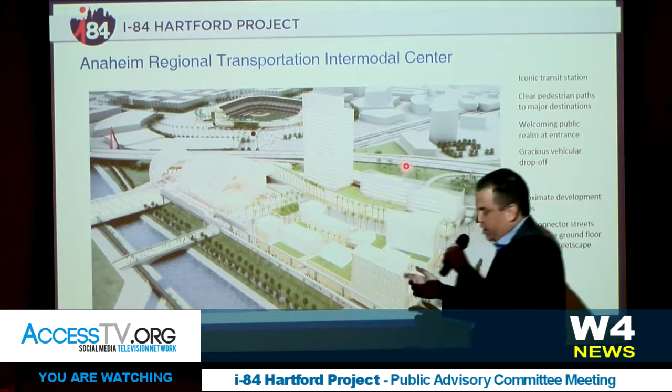I'll let Bill talk about a couple of other examples. Another one is the Anaheim Regional Transportation Intermodal Center. This train station exists today, but as California builds out the high-speed rail system, the idea is that over time, the influence of new transit modes intersecting here will trigger development around the station, allowing for mixed-use development and new streets integrated with open spaces, creating a civic kind of experience around the station. Right now, both train and bus operations occur in the same location.

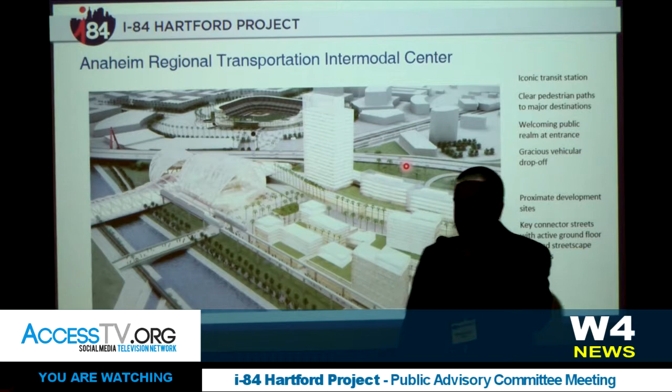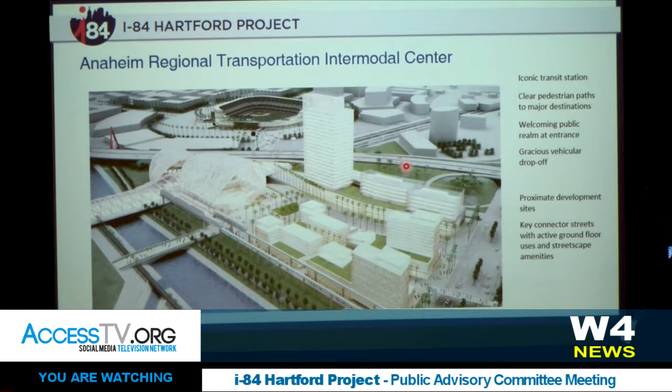These earlier concepts actually looked at more vertical solutions for stacking train on top of bus configuration. One thing we're thinking about is that if there's a signature design space that also incorporates development, it sets up other development potential for all the other sites in the area. This is a very big, bold, urban example, but Transbay is the type of facility that had stacked, integrated mass transit.

I think it fits within the context of the community. It's a signature space, but it's also a development site. We've been searching for a space large enough to begin thinking about doing that. That's also the space we've considered as the one to be capped, so it's very challenging. Perhaps the goal should be: if we have to cap this area because that's what's really needed, maybe we can take advantage of its height and prominence and turn it into the signature site that sets up the neighborhood.

This is strictly my opinion, strictly my vision. I believe the station must be at a high point and must address the park. If you put it on the north side of Asylum, it doesn't directly address the park, and it doesn't really complement the Memorial Arch, the Capitol Building, and other structures in the park.

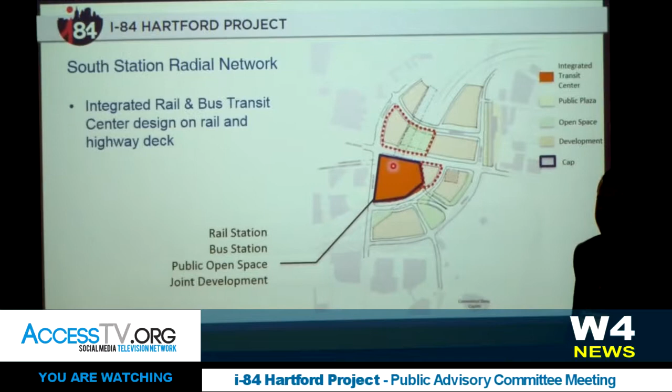Secondly, I'm not sure I understand why you need to extend the green space of the park into that triangular area. I think it would be fine to have development that fronts on the park, as long as it's not too high, and as long as it doesn't obscure the view of the station, which should be the dominating structure.

I had one other question, or comment. The city historically tends to desperately grasp at every square foot of developable space. Don't do that. Make the very first priority the location, design, and sense of place and surroundings of the station itself. Then fit the development parcels in around it.

And you'd have the whole north side of Asylum available if you put it there. You can have lower height development in front of the station, as long as it's not obscuring the view of the station.

So Tony, you're saying you like the south location, don't necessarily think of it as a development site as well as a station, focus on creating a great station. Exactly, but also have the visual connection that you really want to have to Bushnell Park.

Okay, but I don't see why you can't have development in that same triangle as long as it complements the station. There are so many different ways of thinking about integrated development. Right, it doesn't have to be all stacked together, but the idea is that because of the public investment done there, you could have a shared joint development opportunity at that site, which would really be a big win.

We're going to incorporate the feedback we heard today. What I was hearing, there's still a lot of favoritism towards looking at the Farmington Avenue extension. We know there's some challenges with that, but we also know the city is not ready to take that off the table and wants to evaluate it in more detail. But clearly from your comments today, that's something we want to continue to look at. So all of these local road configurations, we need your feedback. If there's anything about the Myrtle Street, Ashley Street connection, the Garden Street, or any of the Trident options, please give us your feedback—call us, write us, email us, whatever. Come talk to us after the meeting. We need to start to hone in on some concepts.

And then, of course, we're going to continue working on these multimodal station concepts. We heard a few things from you today. The working sessions have been invaluable, and we've been getting a lot of great critiques. So I think we're continuing to evolve our thinking because of your feedback. And as Rich said, in 2018 we should have a much more refined set of ideas and options to start to roll out to the general public, and we hope you also attend those as well. Just in wrapping up, is there any other final thoughts, questions?

Everybody wants to get out of here? Okay, thank you again for your attendance, and we look forward to hearing from you all.